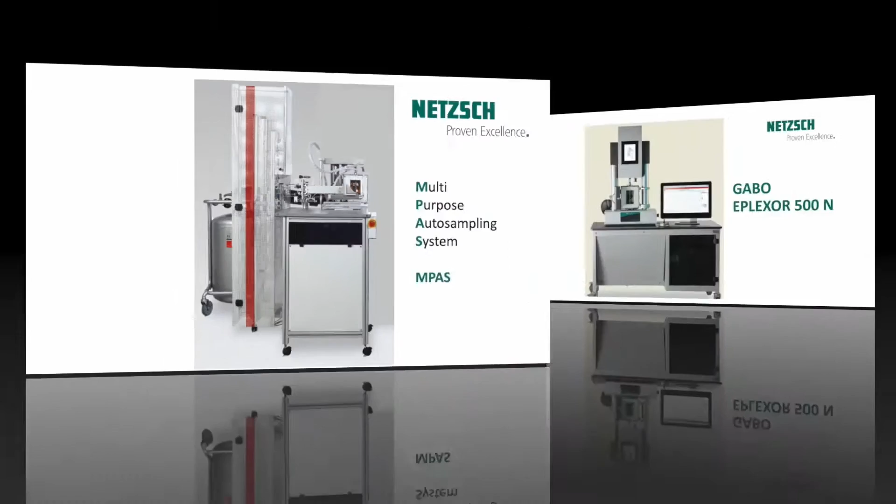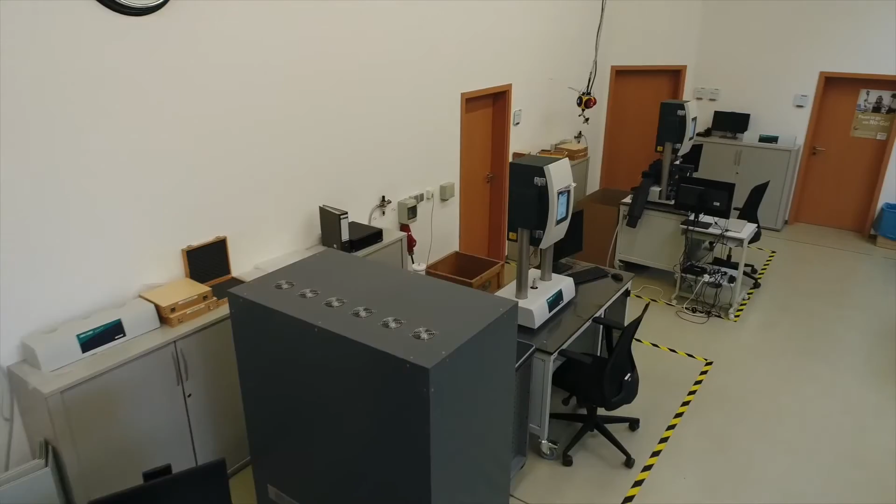This is our new manufacturing hall. Please follow me over here. Here we have installed our MPAS for your demonstration purposes.

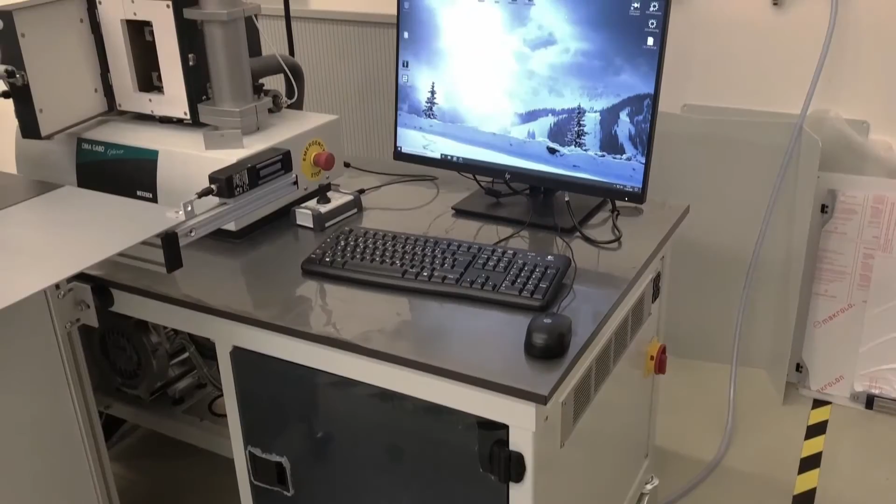This is a version we have already modified and prepared especially for your tensile samples. This autosampler is prepared for 30 samples. I'm sure you know this autosampler, the MPAS, can be used for at least 4 different sample holder types without any user interaction. Tensile, compression, double shear and 3-point bending are the most important geometries.

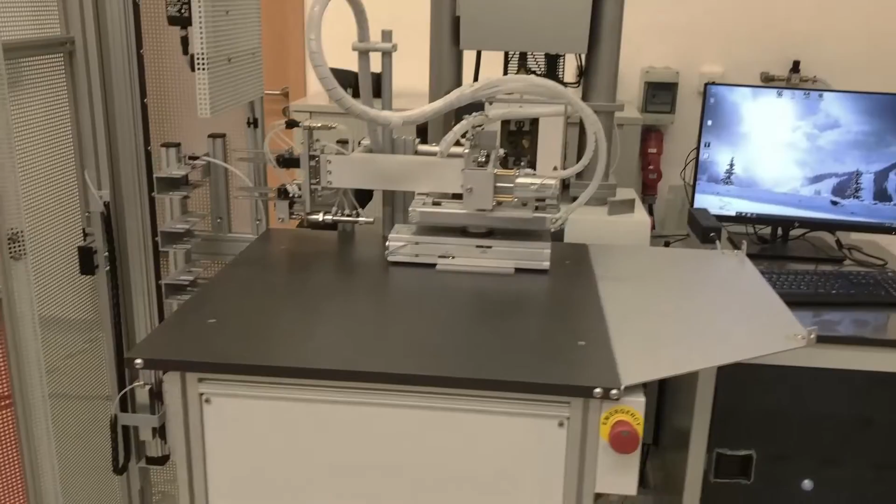By the way, this system is unique in the world market. Normally, at least the MPAS is able to handle samples having a different length of 30 and 10 millimeters. Your samples arrived last week and 2 of them are already installed in the autosampler.

Okay, now we are ready for a demonstration. Regarding your rubber compounds, details about the glass transition temperature and the Payne effect are the most important information. Therefore, I propose to start with a strain sweep. We will receive information about the Payne effect, followed by a temperature sweep showing the Tg, the glass transition, of your compounds.

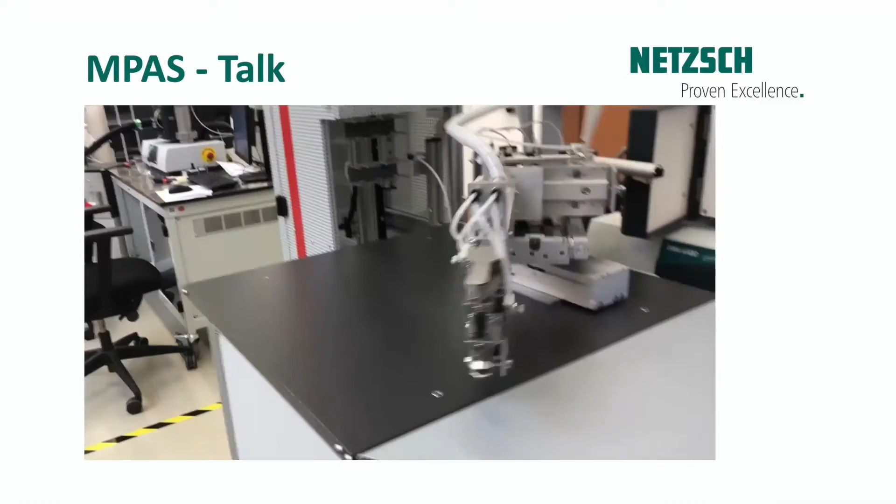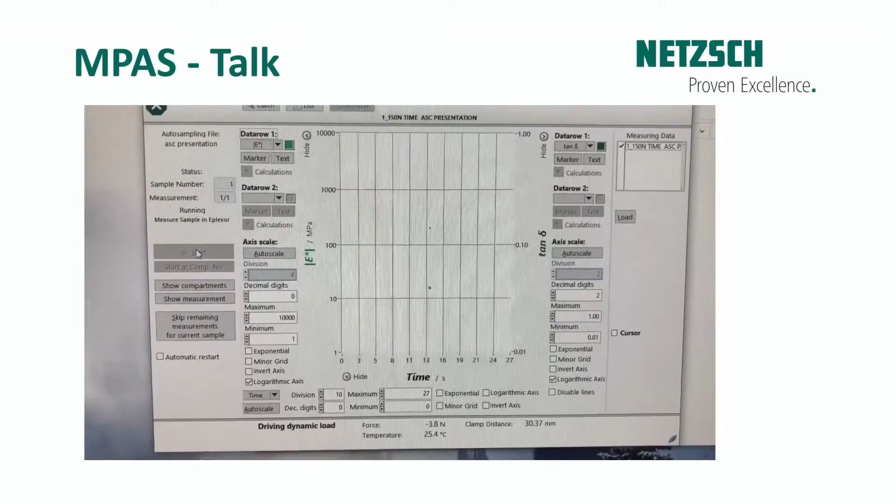This should be done for 2 identical samples. I have prepared the test conditions already. Due to the fact these samples are from the same batch, we should expect very similar results for both samples, for the strain as well as for the temperature sweep. Now we simply need to start the autosampler. Do you have questions?

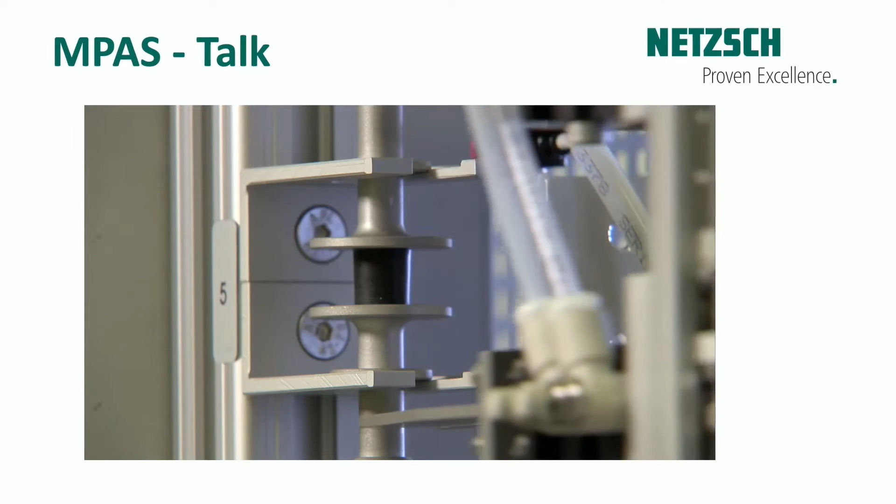Oh yes, I have a few questions. Of course, that's what we have agreed already. It's okay for me, I have written down my questions. Please wait a moment, let me look at my notes.

Okay, first question. You told me 2 different sample lengths can be handled by the ASC. Are there any restrictions in width and thickness?

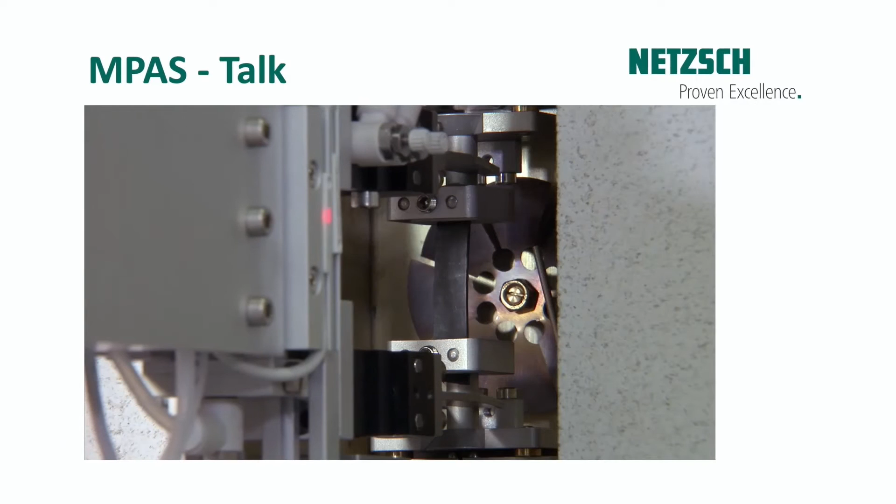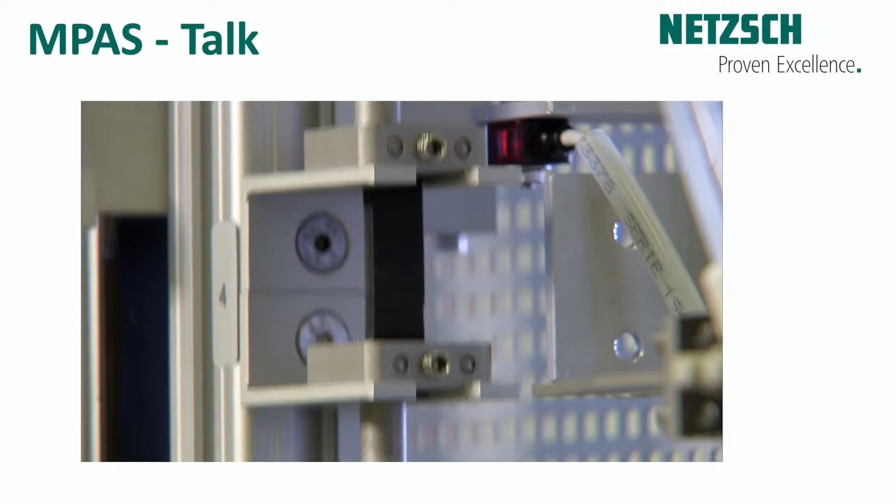Normally not. A thickness from 1 to 4 mm and a width from, let me say, 2 mm up to 10 mm is possible. But I recommend samples with 2 mm thickness and 5 to 10 mm width. Normally in each rubber lab, plates having a thickness of 2 mm are available. The same is true for plastics or other materials. Don't worry, I guess this is the best choice.

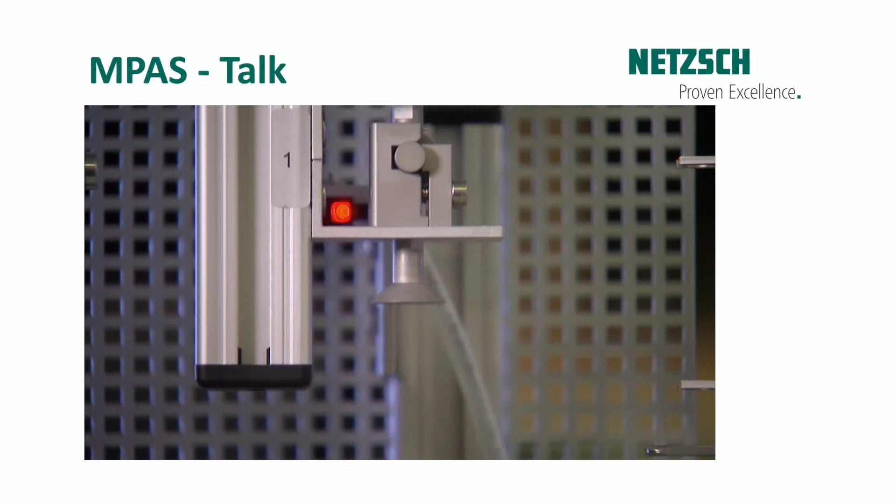That's really very clear. Okay, my second question. I guess I need to measure the sample dimensions for all samples before feeding the autosampler with all my samples. Is that correct?

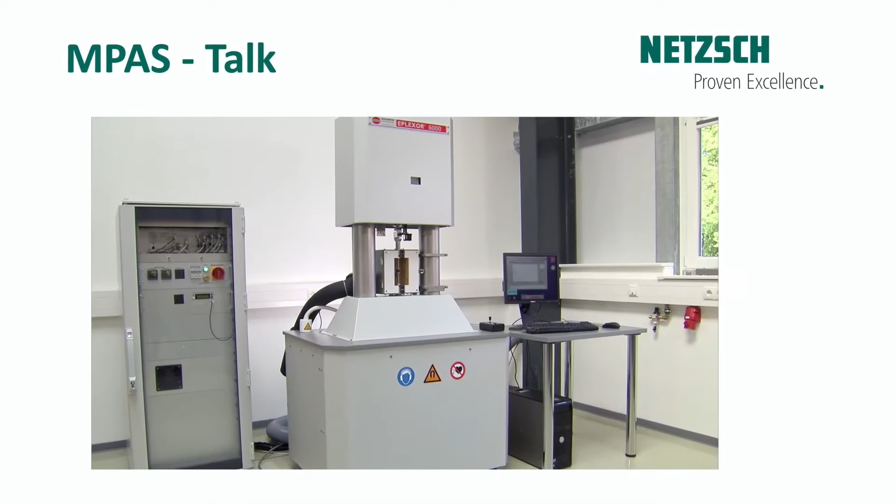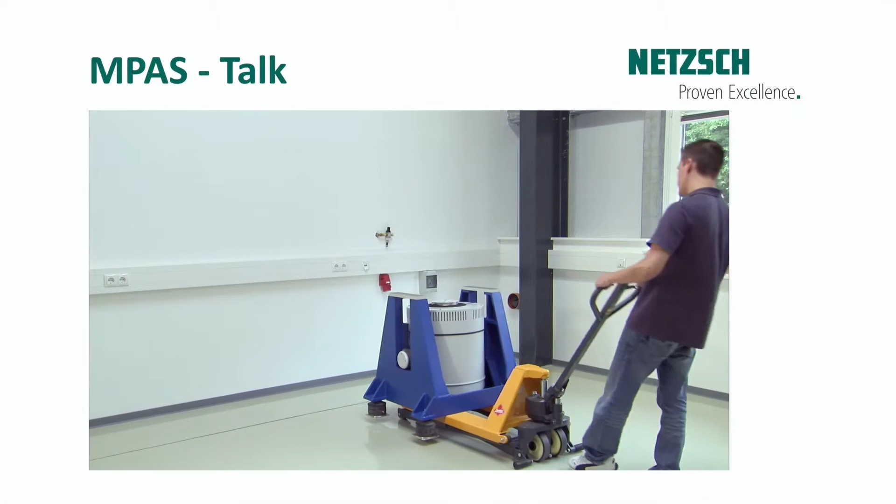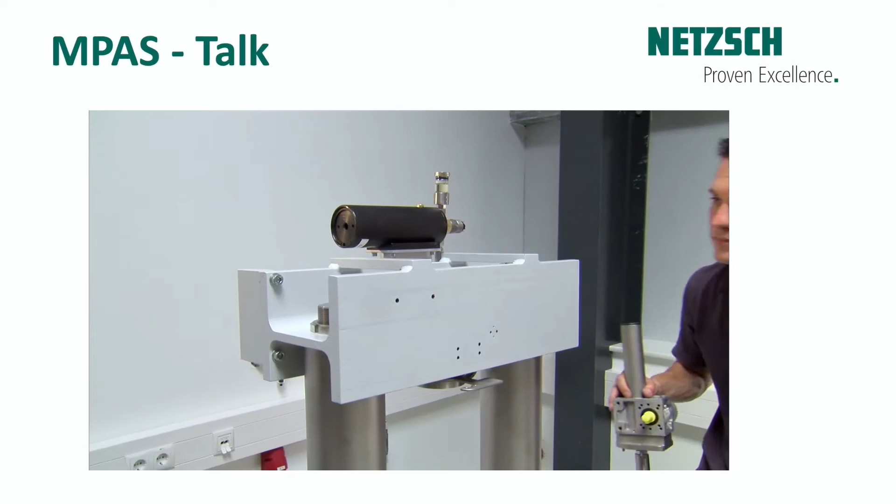A good question, the answer is yes and no. Normally the thickness of the sheets used for sample preparation is fixed due to the vulcanization process itself. It's normally about 2 mm. Depending on your cutter, you will get a final geometry, for instance 10 mm. This means the cross-section should be fixed, this is 2 mm by 10 mm, okay?

But unfortunately, the sheets do not show a constant thickness. It could vary from, let me say, 1.8 to 2.2 mm, sometimes even more. Therefore, I guess it makes a lot of sense to measure the thickness of the samples before the test. The same should be done for the width, since some material flows and the width can become wider than the dimensions of the cutter. The good news is, even if you have forgotten to type in the correct dimensions before the test was performed, the software allows you to type in the geometry afterwards, even if the test is over.

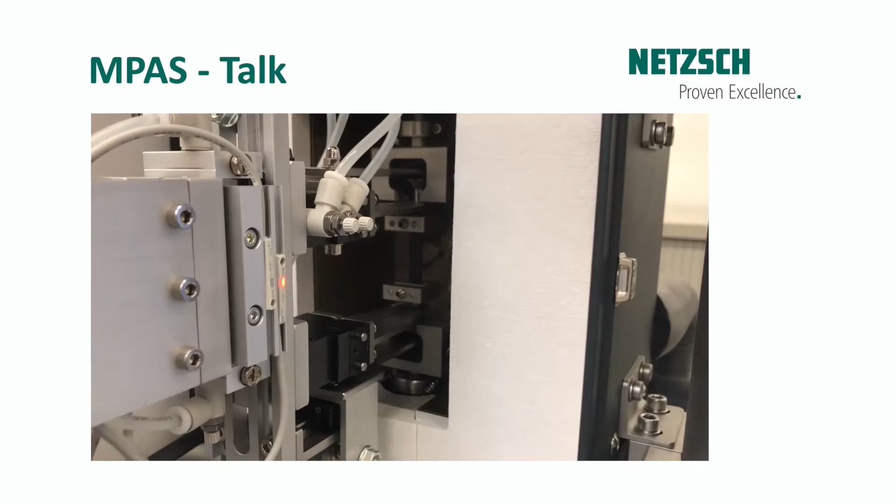Okay, I understand, this seems to be acceptable for us. Please, one last question, of course only for the moment. I guess I will have more questions later on.

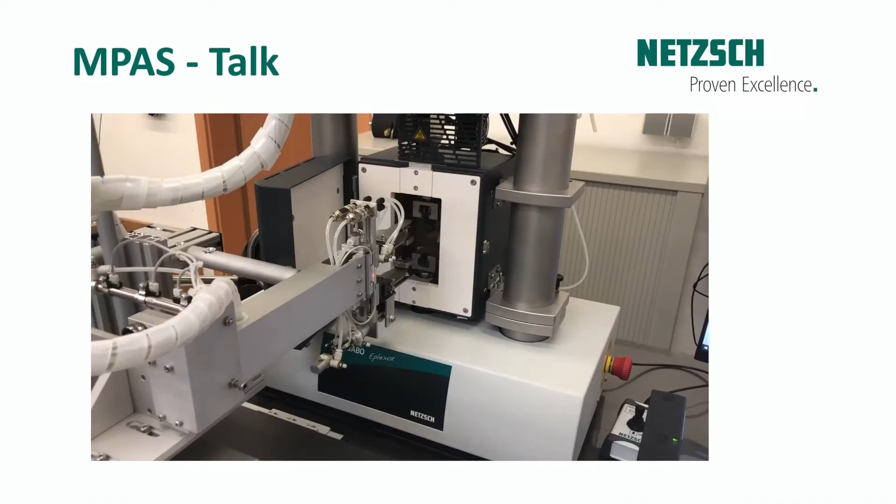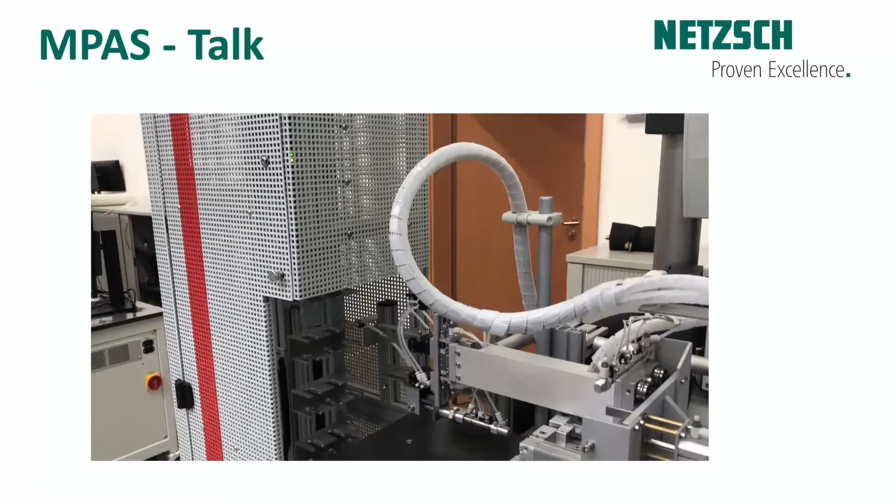You never know. I know from my existing DMA, after cooling down to a sub-ambient starting temperature, for example minus 100 degrees, it is mandatory to open the furnace and tighten the screws of the sample holder again, because the sample becomes loose at low temperatures. I guess this must be the same problem for the Eplexor and the ASC. Am I right?

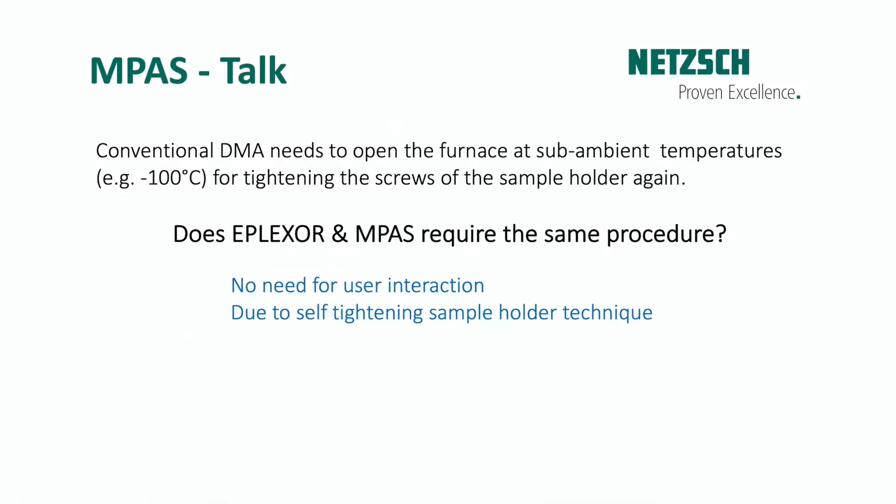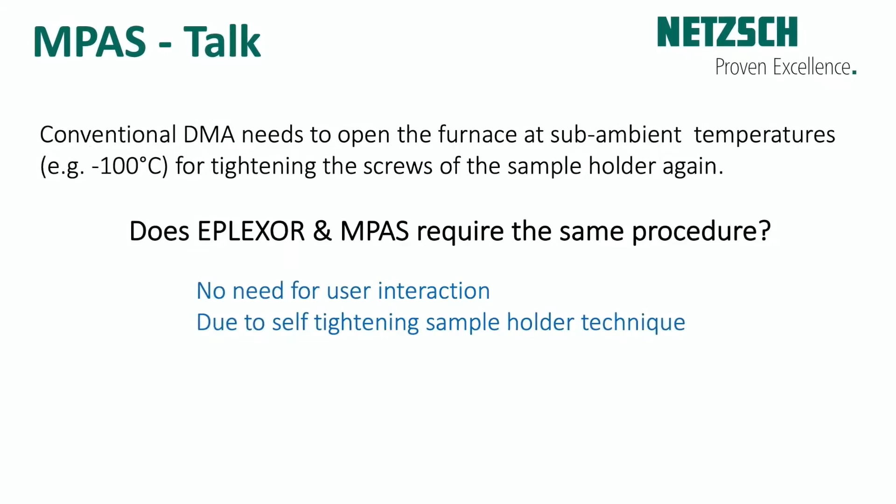Good question, but this is not a problem with this system. The holders are designed as self-tightening systems. There is no need to open the doors of the temperature chamber at low temperatures and tighten the holders again. This would not be very convenient and will not work for an automatic system. I guess this is quite clear.

Okay, let's start the run. Now let us look at 2 full cycles of the MPAS. During the first step, the magazine is moving to its starting position.

If the starting position is achieved, the robot arm moves forward and is picking up the corresponding sample in the sample holder.

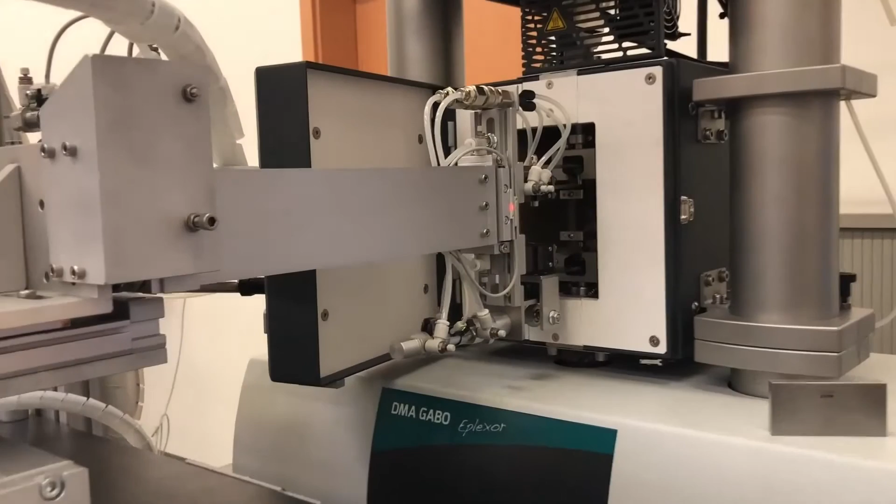Now the robot arm is turning by 270 degrees and is inserting the sample holder with the sample, in this case a tensile sample, in the corresponding receptacles inside the temperature chamber.

Now the arm removes and turns back to its rest position. Now the computer is preparing the test.

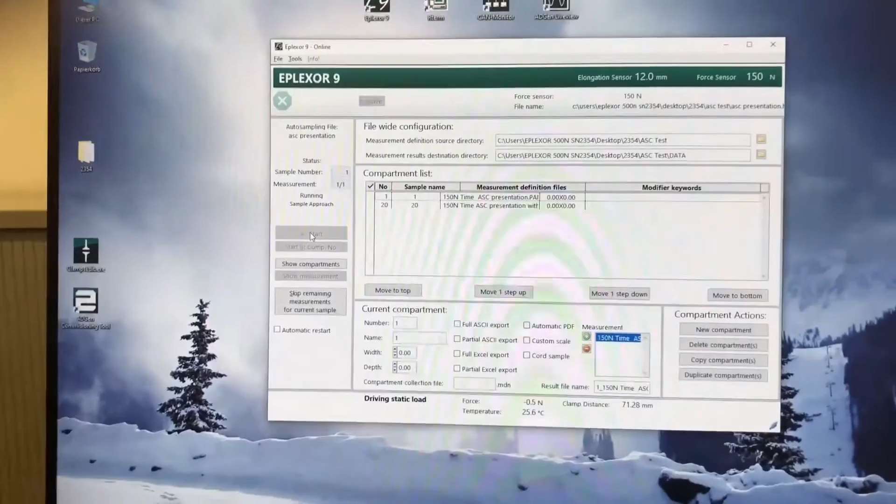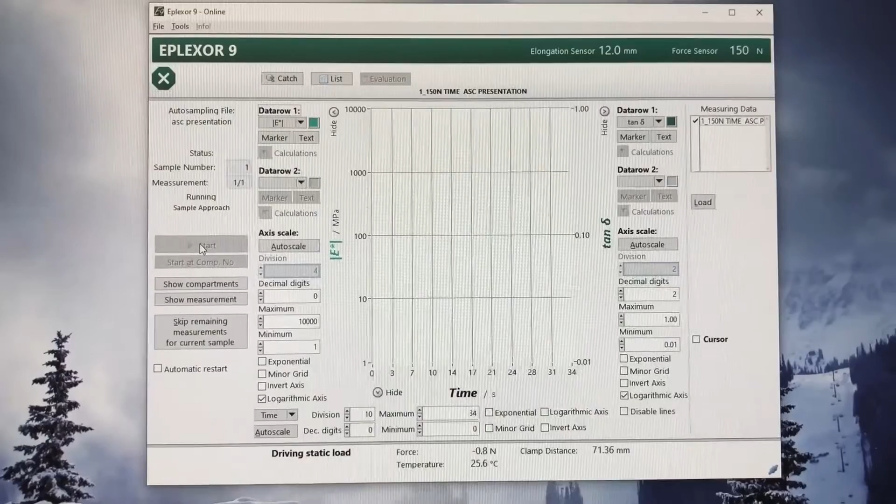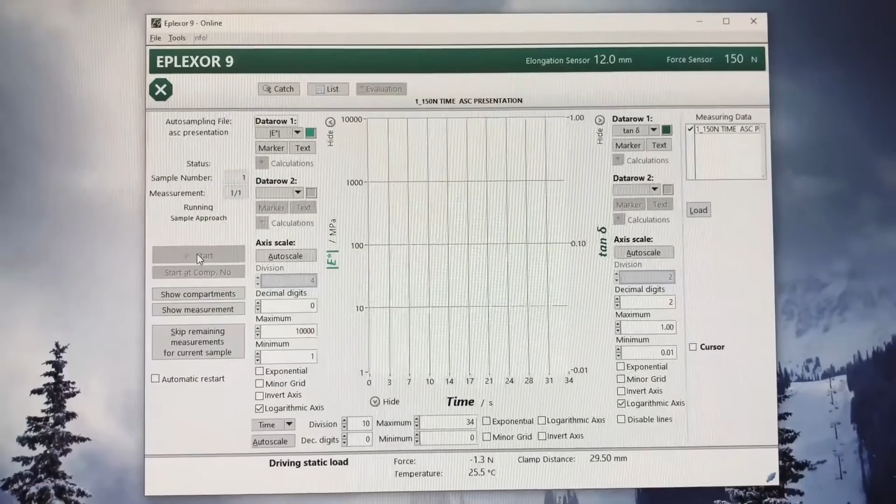Let's take a look at the screen of the monitor. Now the online graphic appears on the screen. The instrument itself is preparing the static and dynamic load conditions before the system executes the first data point. Here is shown a time sweep with a total of 5 data points.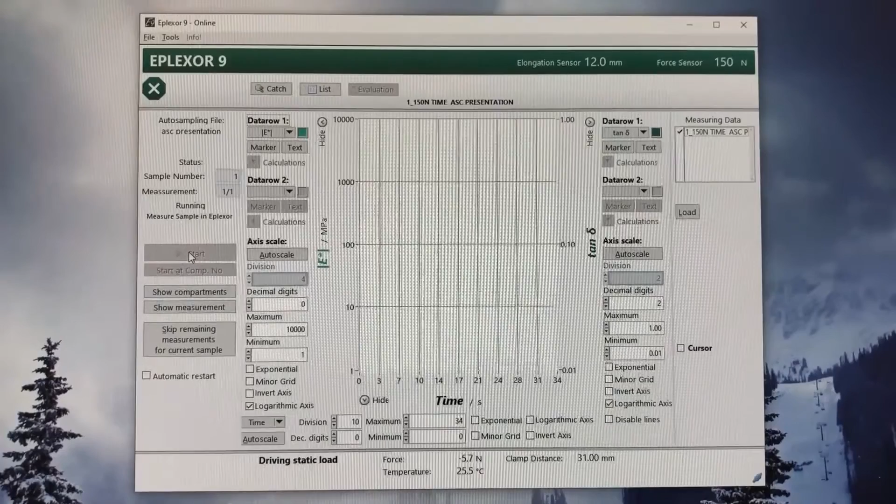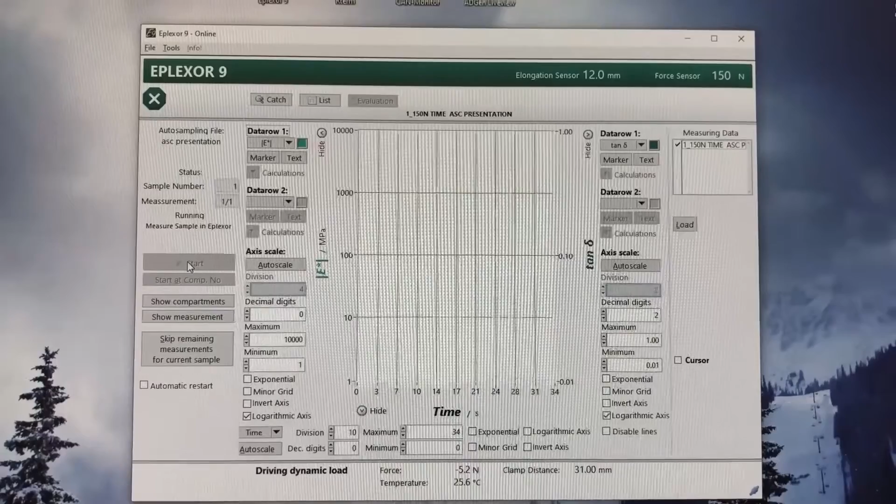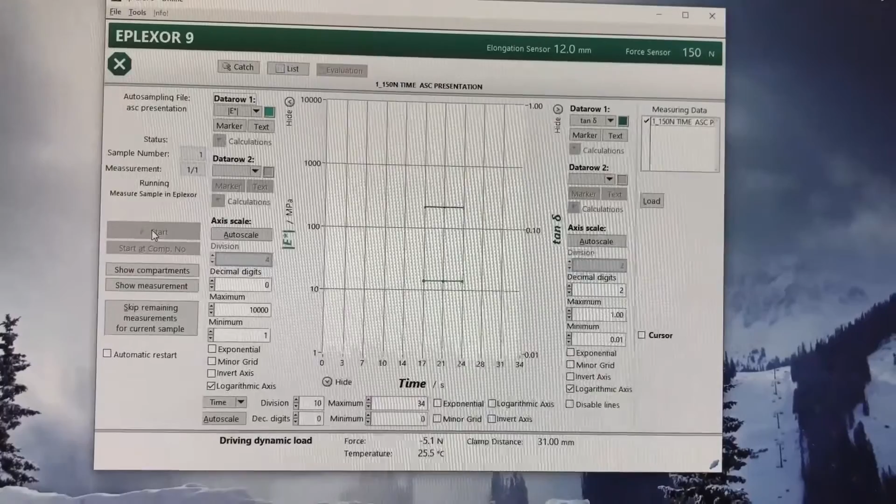Now we are expecting the first data point of this time sweep. Okay, now the data point appears. Number 2, number 3, number 4, and now the last data point. Now the test is over.

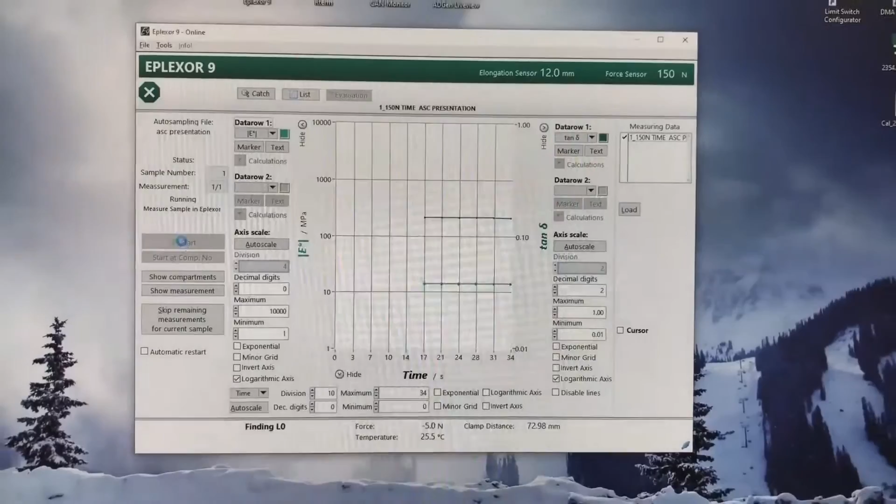The robot arm moves around from its rest position and moves into the front of the temperature chamber. Right now the system is picking up the sample and moves it back into the magazine of the MPAS.

Okay, now it's coming out, is turning around, and the sample comes back to the original magazine. The second sample was installed on top of this magazine, on the roof.

Here we have 10 levels. Now we have reached the 10th level and the arm has already picked up the sample from the magazine. And now the arm is turning around to install the sample in the temperature chamber.

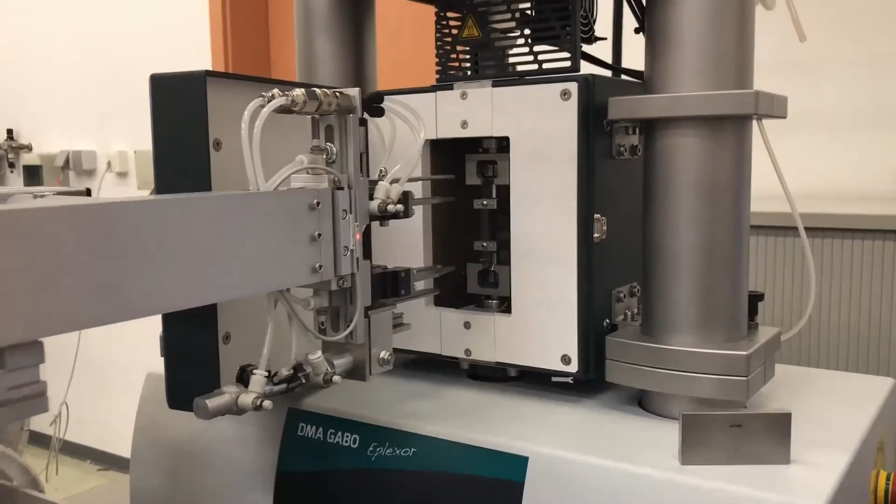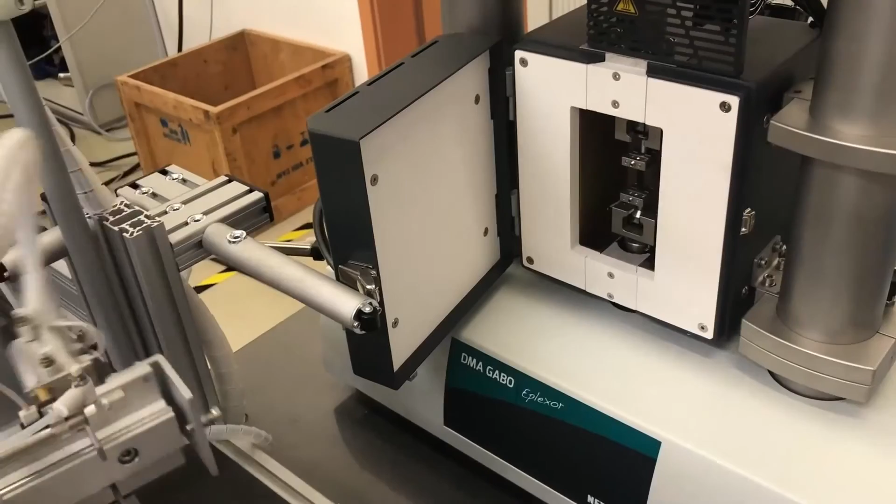Here we are performing a temperature sweep, and that's the reason why at the end of the day the autosampler, the MPAS system, is closing the door automatically. No human interaction is required at that point. Everything is running fully automatic.